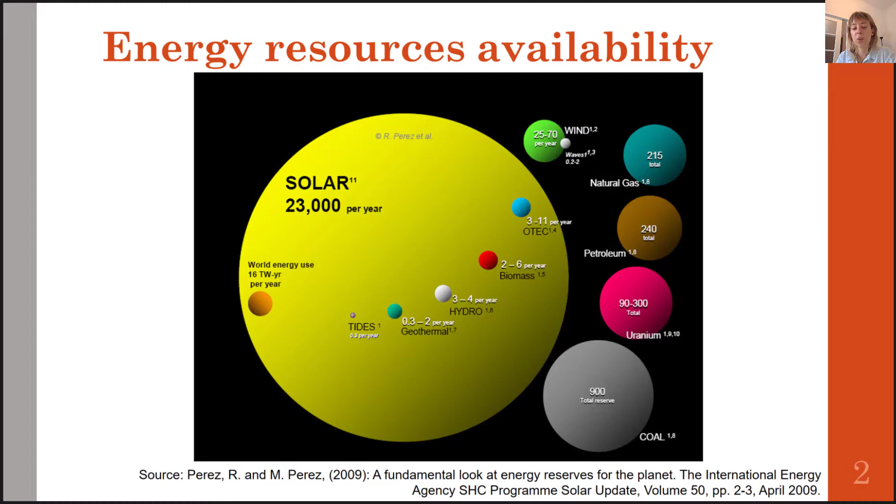Now, despite having so much solar energy available, the problem with the sun is that first, it's dilute, so we only have 1 kilowatt per meter square, and it's intermittent. Every energy resource is going to have its trade-offs, and this is the situation we're dealing with when it comes to solar energy. This is where concentrated solar power comes in. A lot of you are already familiar with concentrated solar power, and some of you may not be. It's a technology that has the potential to eliminate the problem of intermittency in renewable energy.

The way it works is you have this big field of mirrors on the ground that concentrates natural sunlight hundreds to thousands of times and focuses it onto a receiver, which in this design is located at the top of a tower. This is really the state of the art in concentrated solar power technology at the moment. The receiver consists of arrays of tubes with a fluid circulating inside. The sunlight heats the tubes and then the fluid inside. This can be a molten salt heated to temperatures from 500 degrees C to 1000 degrees C, and it's then used as a heat source for power generation.

We can have a closer look at how this tower technology works in terms of power plant operation. The salt exits a cold salt storage tank at 290 degrees C and is circulated to the top of a tower through the receiver, where it's heated by concentrated sunlight. It then circulates back down to a hot salt storage tank, in this case at 565 degrees C. Then it passes through a heat exchanger where it converts water into steam, which is used to drive a steam turbine and produce electricity.

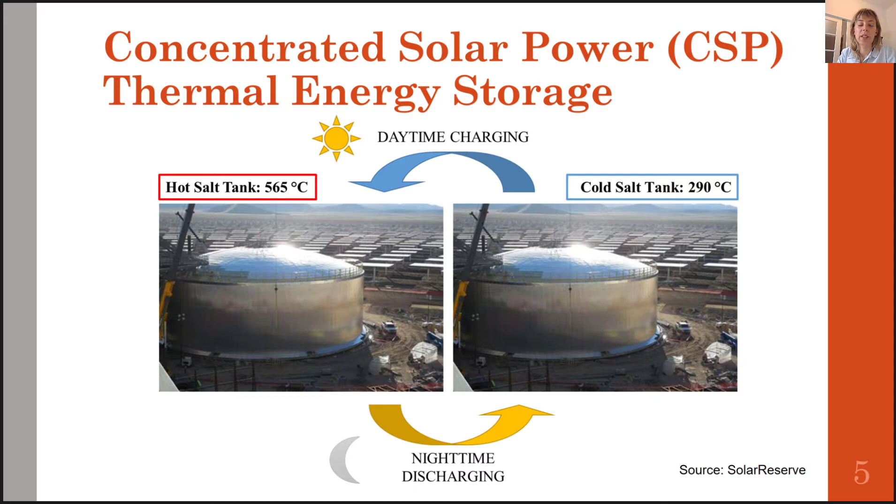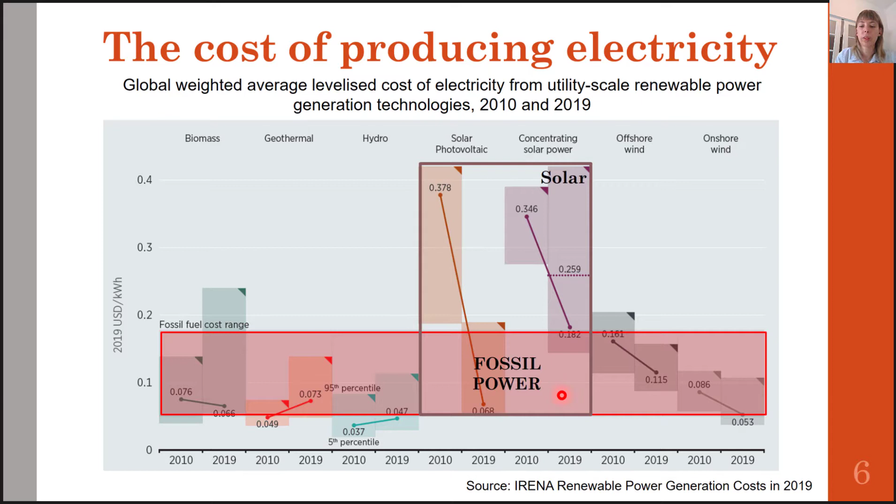And the main reason is CSP plants are still a very large capital cost investment, and so they're really expensive to make. So if we look back at our state-of-the-art solar tower technology, here we have the field of mirrors, so the heliostats are the most expensive components of the entire system.

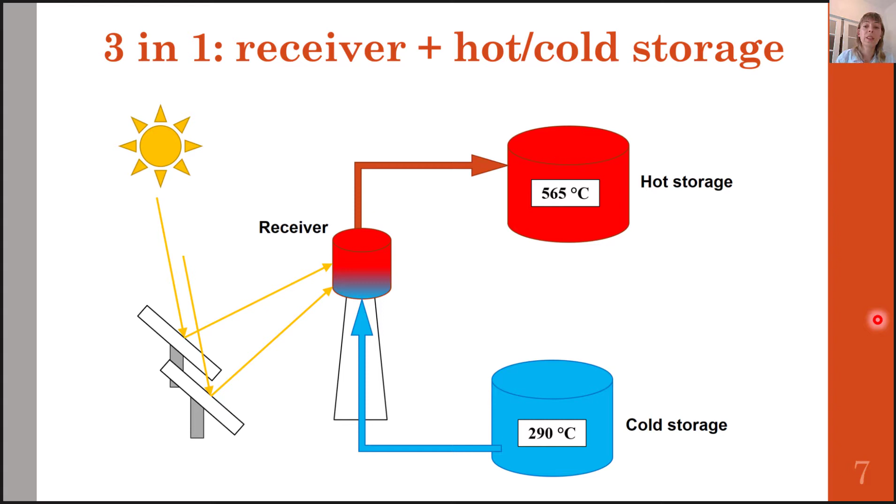Now, the other problem with this technology is we have a receiver and storage technology, so these two tanks that require very high pumping powers in order to pump the salt at very high flow rates to the top of a tower and then to these two storage tanks. So in order to reduce these pumping requirements, which will in turn reduce the cost because we'll also need less heat tracing, we would ideally like to combine all three into a simple single unit.

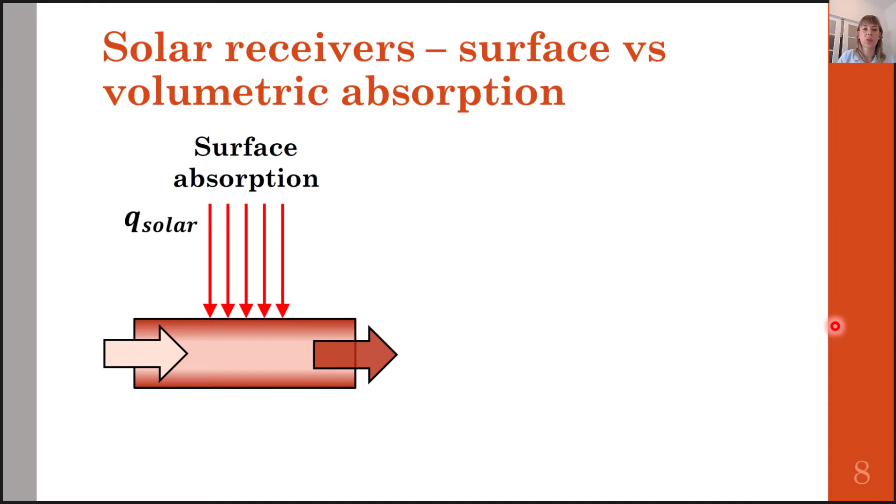Now, the other issue is that the max flux that can be tolerated by the receiver is limited by the tube material. So as you recall, this receiver consists in a bank of tubes, and this concentrated solar radiation irradiates the tubes and then heats the heat transfer fluid. So an alternative is to absorb this concentrated solar radiation volumetrically directly into the working fluid itself. So it's a self-healing surface that can tolerate higher solar fluxes and solar flux variations.

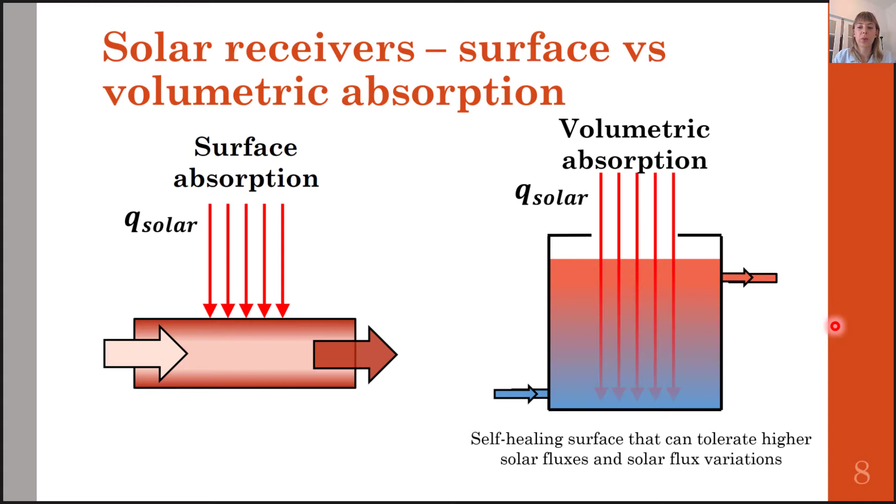So this brings me to the CSPonD concept for concentrating solar power on demand. So in the CSPonD, we essentially have a 3-in-1 CSP concept with volumetric absorption that essentially eliminates all the issues that we have with this tower technology. So the way that it works is concentrated solar power is beamed directly into a big open tank of molten salt where it's absorbed volumetrically since the salt is semi-transparent to solar radiation.

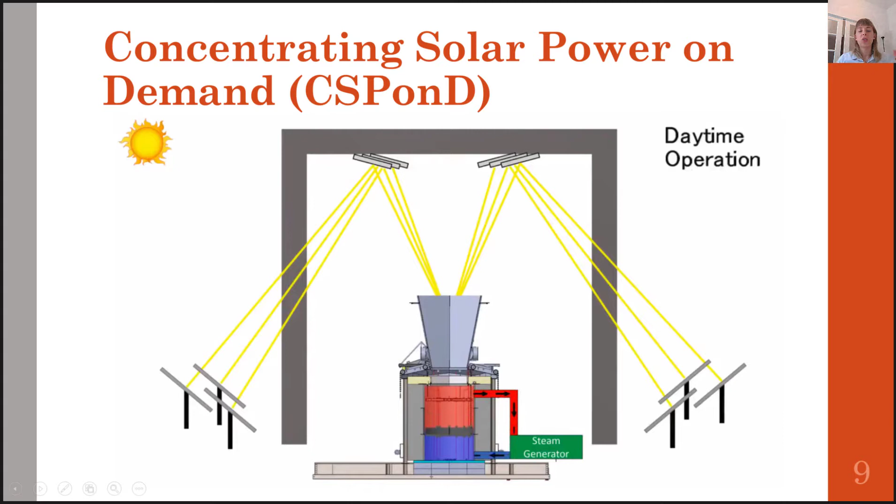Now the tank is divided into two sections by a divider plate. So above the divider plate is the hot heated layer and below is the cold layer. And I have a little animation here that illustrates how the whole system works. So during the day, this concentrated solar power heats the hot layer, and so that hot volume increases, and during the night we close the tank, so we close the aperture, and we continue to extract hot salt from the hot salt layer, except that this hot layer is now decreasing and the cold salt layer is increasing.

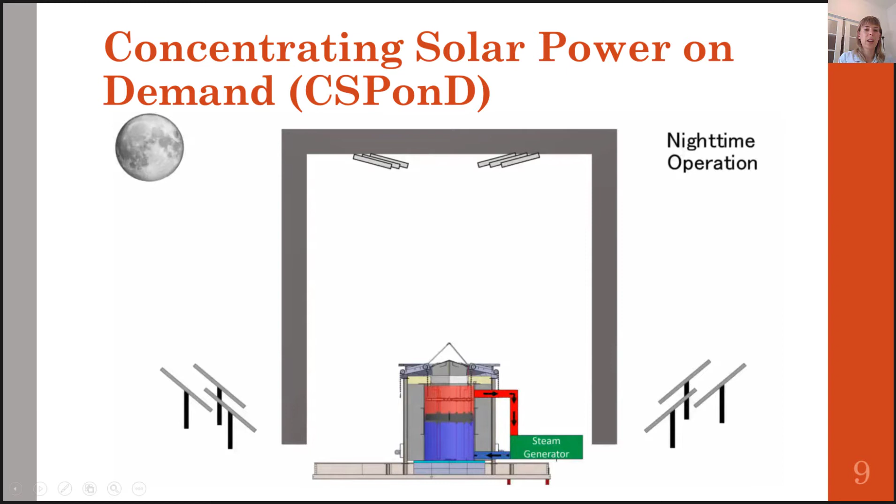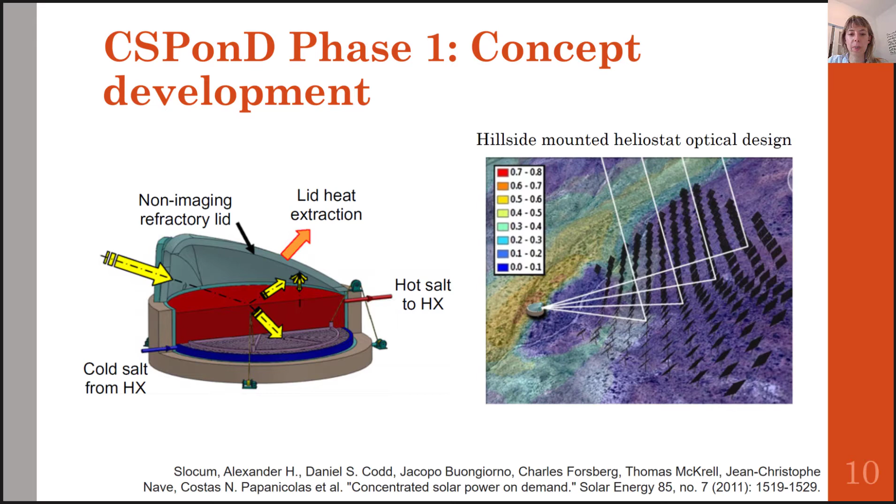So in phase two, this was in collaboration with the Masdar Institute Solar Platform in Abu Dhabi, which is led by Dr. Nicolas Calvet, and it consisted in building a demonstration prototype of a 25 kilowatt CSPond system. So for the demonstration, we integrated the system with our existing beam down facility, but as I just mentioned, a CSPond would not be limited to this optical configuration since beam down technology tends to be a little less efficient in terms of optical efficiency.

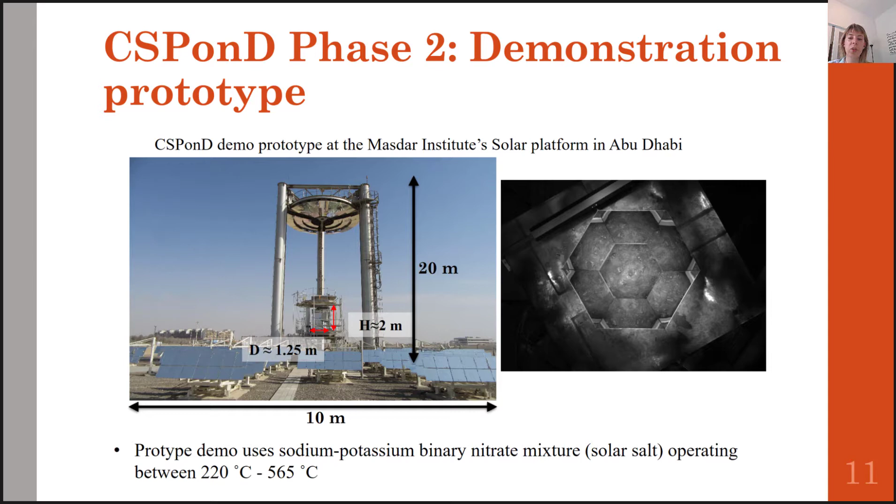So the tank installed is 1.25 meters in diameter and 2 meters in height, and it's filled with sodium potassium binary nitrate salt, which you can see here on the right. This is a view looking straight down into the tank of molten salt.

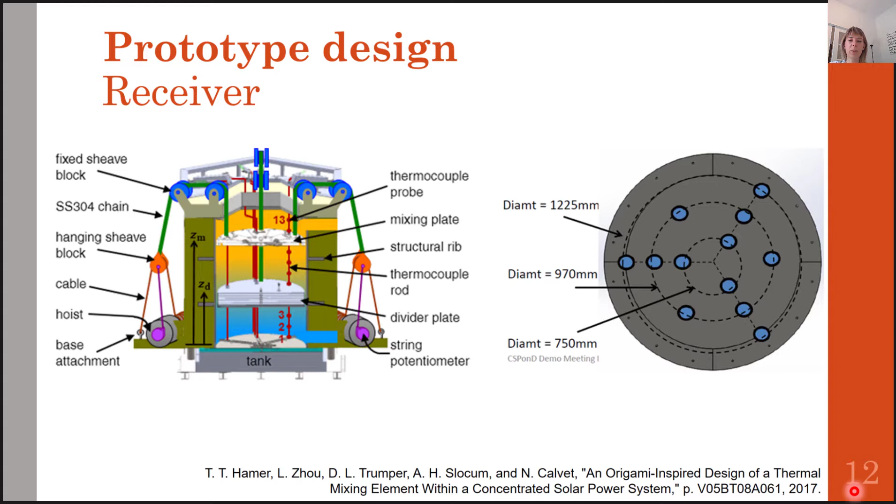So the idea for the divider plate was for the shell to be airtight, such that the poor thermal conductivity of air would insulate the hot layer from the cold layer, and then these internal discs would reduce radiative transfer from the top to the bottom of the divider plate. However, we did have some issues with salt penetrating inside the divider plate, which I'll talk about a little more later.

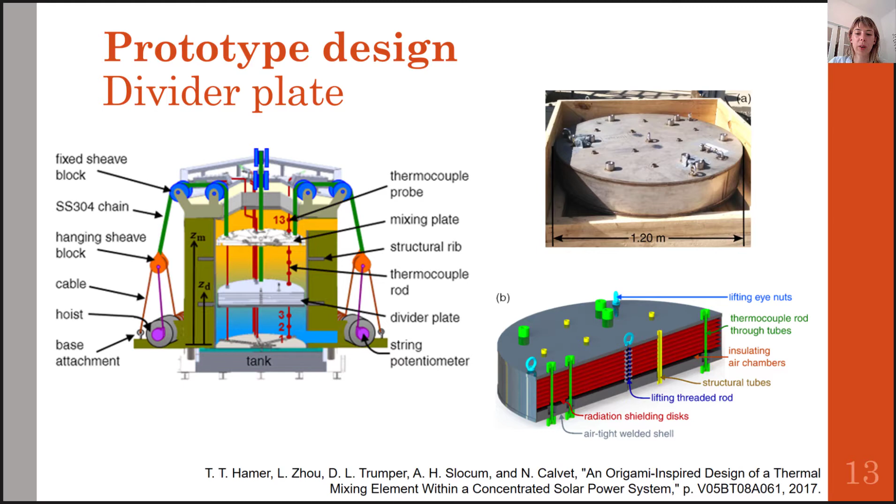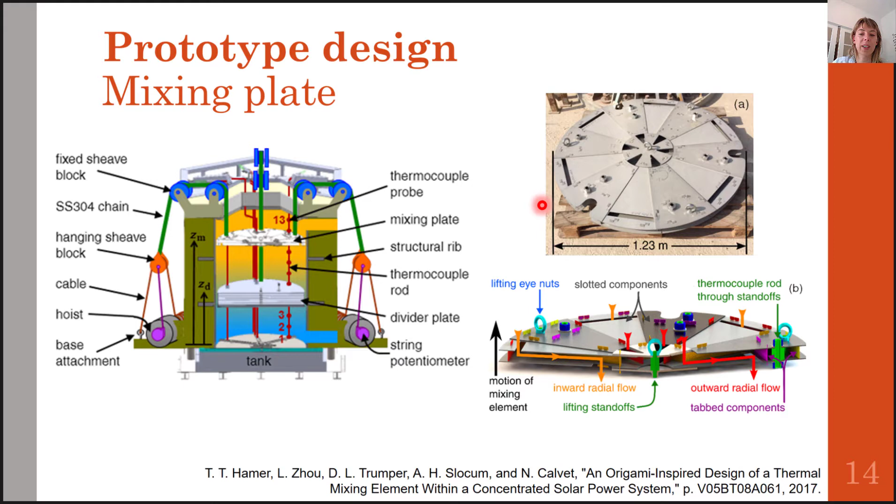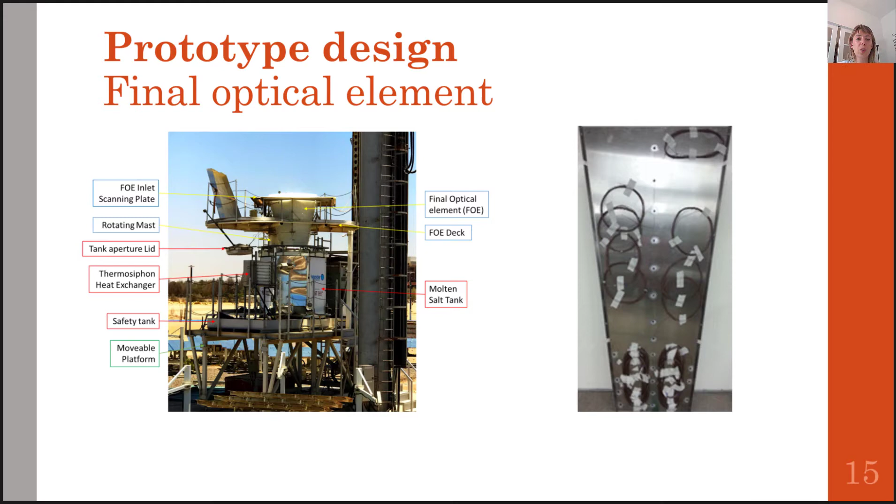Now finally, the tank was mounted with a final optical element, which is a 3D secondary concentrator, to increase the final flux that's delivered to the tank and to reduce the thermal losses. So it consists of a hexagonal cone with aluminum facets, and it was removed at the end of each day, and the tank aperture was closed at night in order to reduce thermal losses during nighttime operation.

So the design and construction of the prototype took several years, a lot of cooperation, coordinating a lot of weekly WebEx meetings for people at opposite sides of the globe. So at the time we had people in California, in Boston, in Abu Dhabi, and I think in China. And there was a lot of sweating out in the desert; that was how this whole construction happened over multiple years.

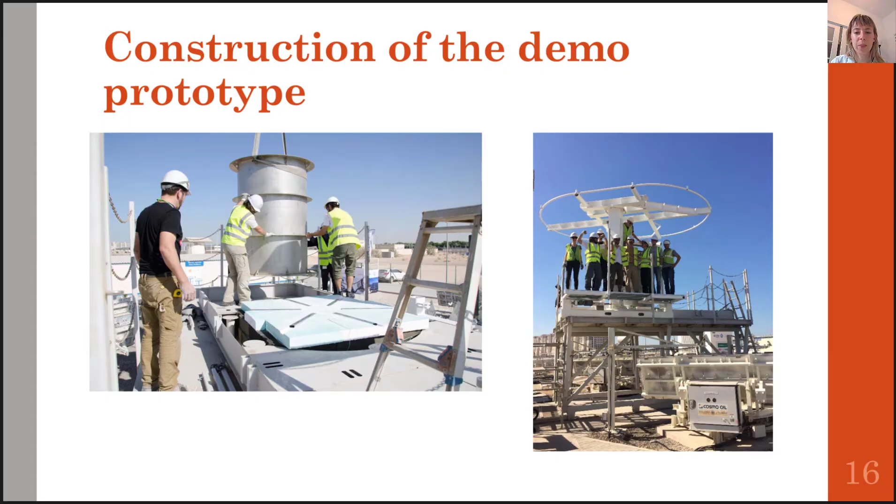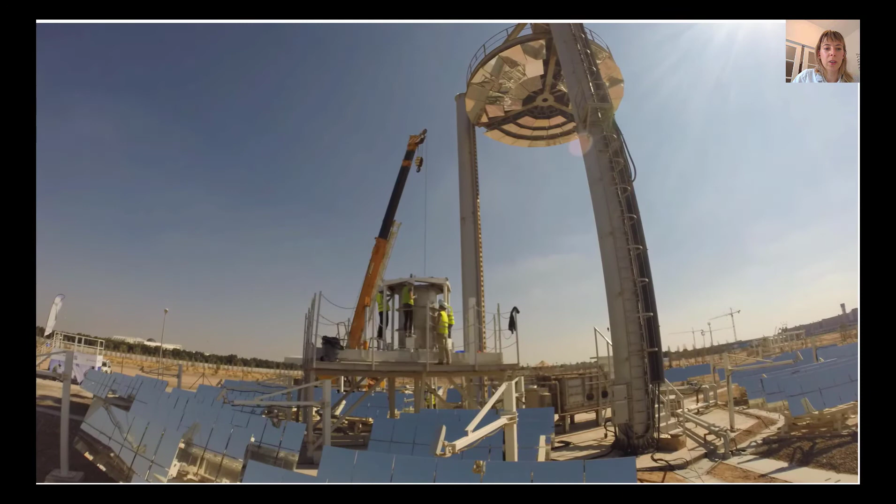So one of our colleagues actually made several videos of the whole construction process over the days and months as it occurred. And so here you can see this was over the course of a day assembling the top collar and the deck platform. So you can see the tank already, and they're installing the top collar. And now we see the deck platform.

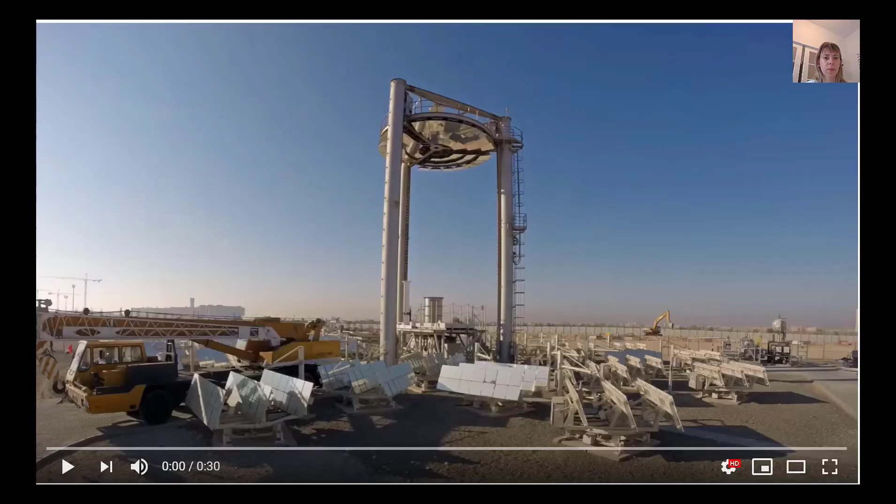And now another video of installing the insulation and the temperature sensors. So I really like seeing the position of the sun change during the day in this accelerated video.

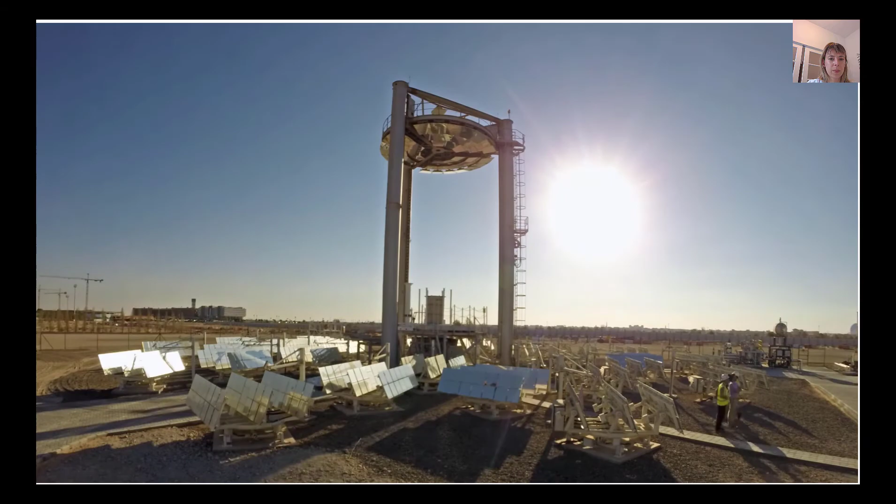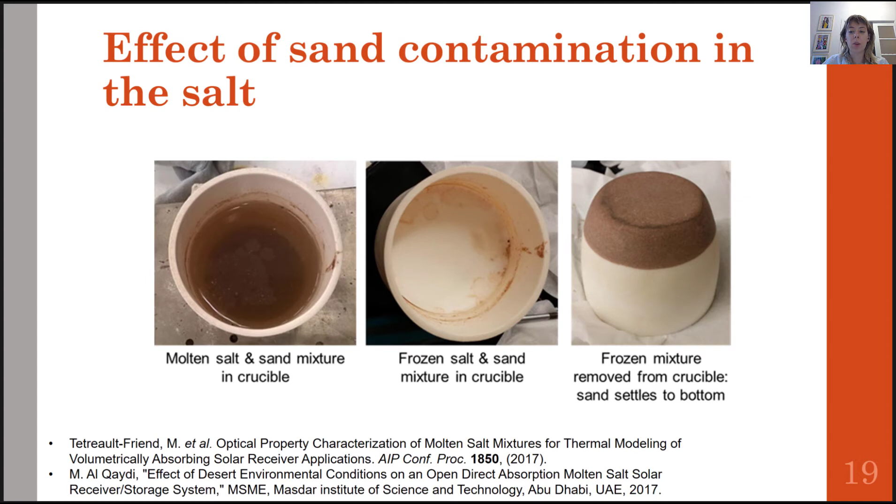So the entire melting process, once we got everything mixed and eventually made a powder out of this giant caked block, took approximately 4 days to complete, and it was done primarily with solar energy, so 80% solar energy, assisted by some electrical resistance heaters. So overall, it was estimated only 20% of the energy used to melt the salts came from external resistance heaters. So in order to accomplish the melting process, each day we added more salts to the tank. So we added some salts, melted it with some solar energy, and then the next day we added more salts, melted with more solar energy, and so on until 4 days later everything was melted.

So this was quite remarkable considering how reflective the salt appears to visible light. In fact, we did not do any optical experiments on the frozen salt, only on molten salts. So we did also look into methods for accelerating the melting process, such as, for example, sprinkling highly solar absorbing slags at the surface of the salt, which would eventually sink to the bottom of the tank once the salt was melted. But we didn't actually need to use them here since we had these resistance heaters, but it is something that we can look into in the future if we really wanted to achieve this without any resistance heaters at all.

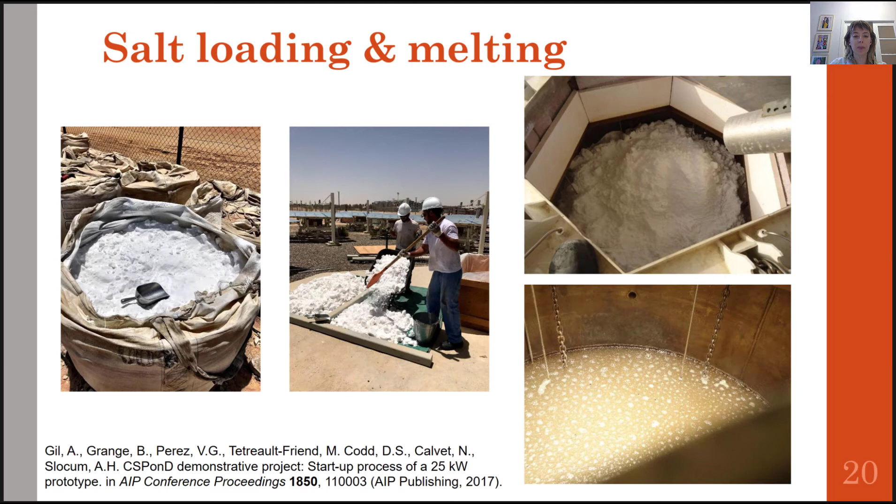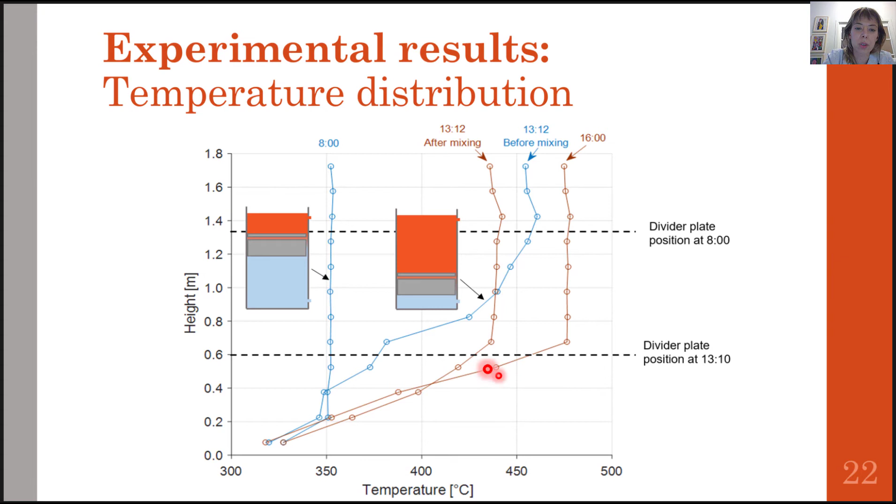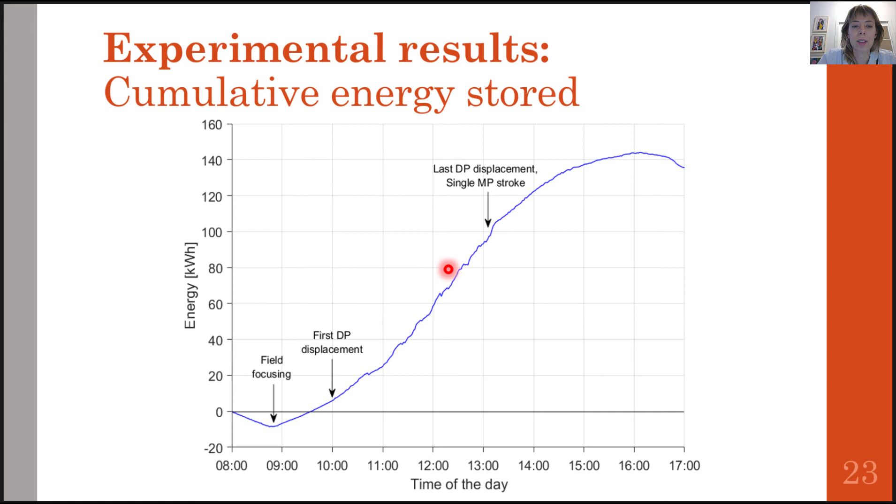Finally, the last experiment that was done was this experiment that we call the uniform charging mode. When the system is to be used to generate electricity only after sunset, the temperature of the hot layer no longer needs to be maintained constant while it's charging. So the receiver losses due to the exposed hot surface can be reduced by charging the entire volume from a colder state to a hotter state, rather than trying to keep the hot layer at some set point throughout. So even with no mixing plate motion, the gradient of temperature in the useful volume of salt is less than 10 Kelvin per meter.

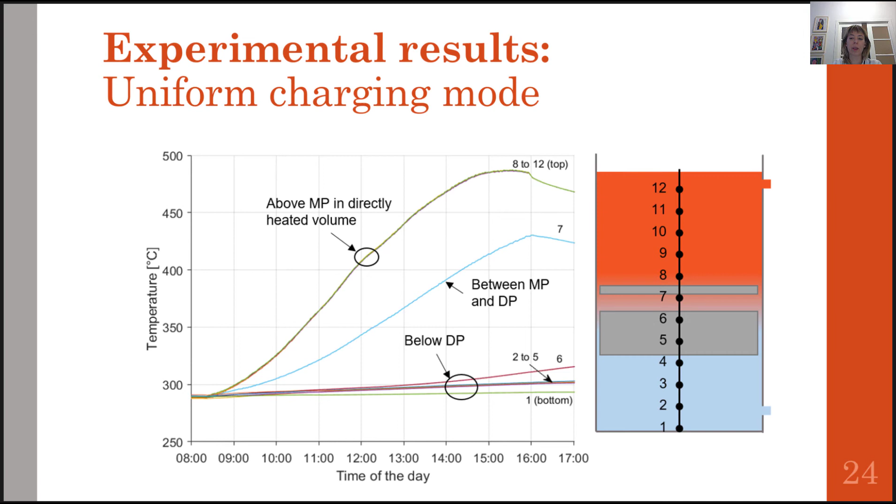So some general conclusions and takeaways. The CSPond allows us to reduce the need of heat tracing that is typically required for tower and receiver piping, because we now have this nice, simple 3-in-1 system. There's no need for high pressure pumps for cold salt transport to the tower receiver, very low parasitic energy consumption. The initial melting didn't require any fossil fuels, so we only needed solar radiation and a little bit of help from our resistance heaters, and it was accomplished in 4 days.

There's no need to drain the solar receiver at the end of each day of operation, and we have a reduced susceptibility to thermal shock because the solar radiation is now absorbed volumetrically. So when we have variation throughout the day due to focusing and defocusing or when clouds pass, it's much less susceptible to shock because it's being absorbed over volume instead.

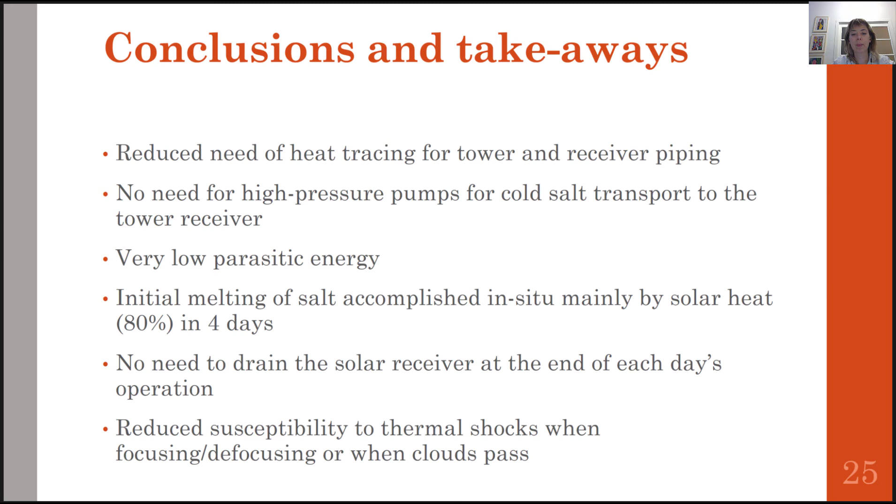Now, some lessons learned and some future work. So there were things, of course, that worked and things that didn't work as well as we had planned. So in particular, if I look at, for example, the divider plate, the pros were it effectively blocks solar radiation from the cold bottom layer. The cons is it was not as effective as we had hoped at thermally insulating each layer.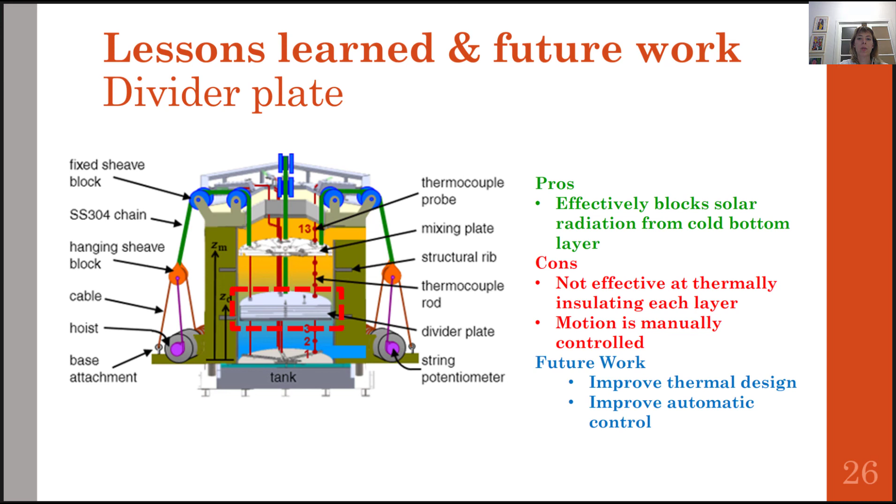So that was one big issue that we had with this divider plate, and the motion is also manually controlled, meaning we do have this hoisting mechanism, but we need some user to actually control its position throughout the day depending on what temperature reading we have. So some future work would be to improve the thermal design and to improve the automatic control of the divider plate.

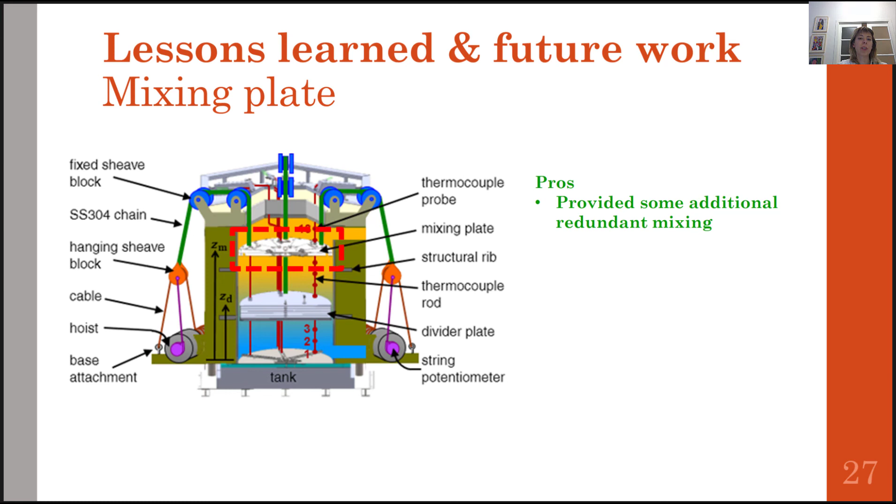Now moving on to the mixing plate. So the mixing plate did a really good job at providing some additional redundant mixing. However, it did block the solar radiation from penetrating to the divider plate. It was not as essential as we initially expected. So if we design the receiver such that we promote passive mixing due to natural convection, we should be able to get away without it.

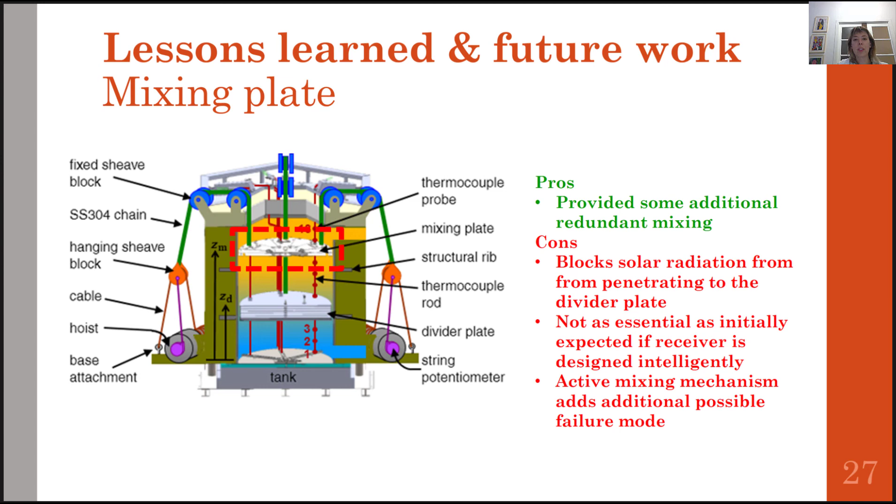And finally, this active mixing mechanism, so we have more hoisting mechanisms, and all of this active mixing is an additional possible failure mode in the receiver. So it is something to consider. So future work involves implementing passive mixing inside the receiver.

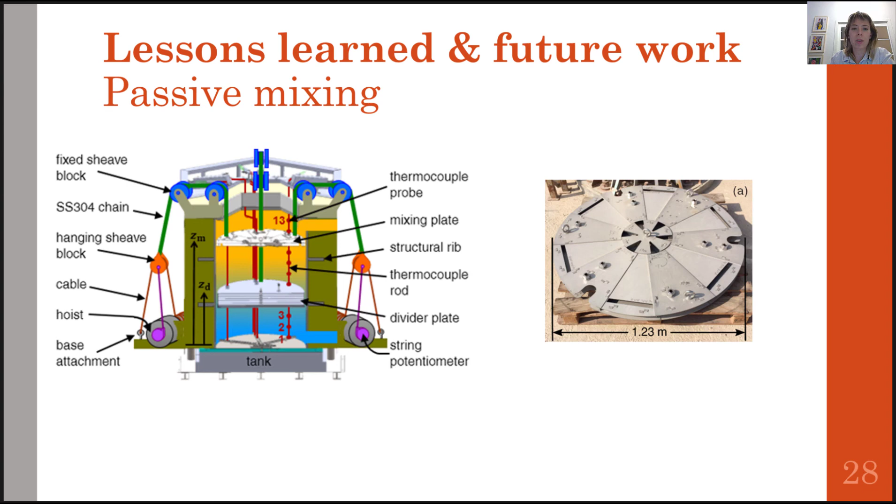So how do we actually get this passive mixing? And as I said earlier on, I mentioned that the reason why we put the mixing plate in the first place was because we had a very poor understanding of the overall thermal fluid behavior. So that has changed in all the years since starting this project. We did gain some insight in the thermal fluid behavior inside the receiver.

And so by doing some CFD and some theoretical analysis, we now have some models to actually predict the temperature distribution in the receiver as a function of time, and to actually predict what conditions are favorable for natural convection.

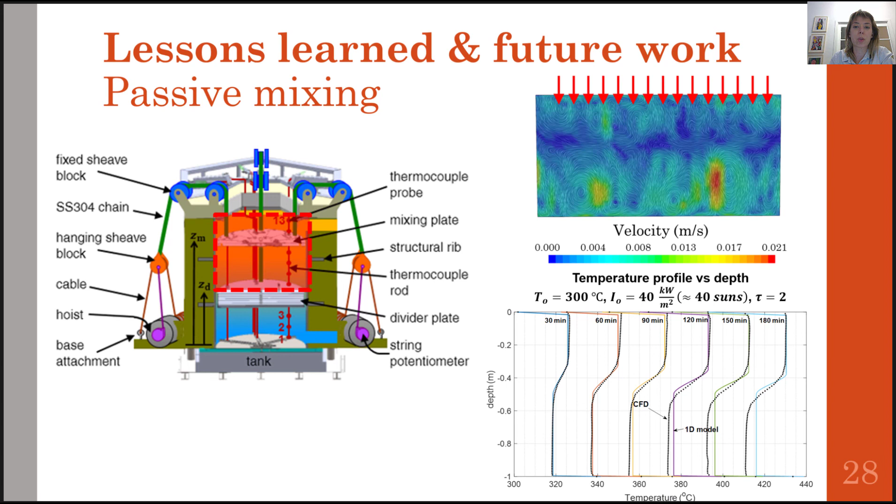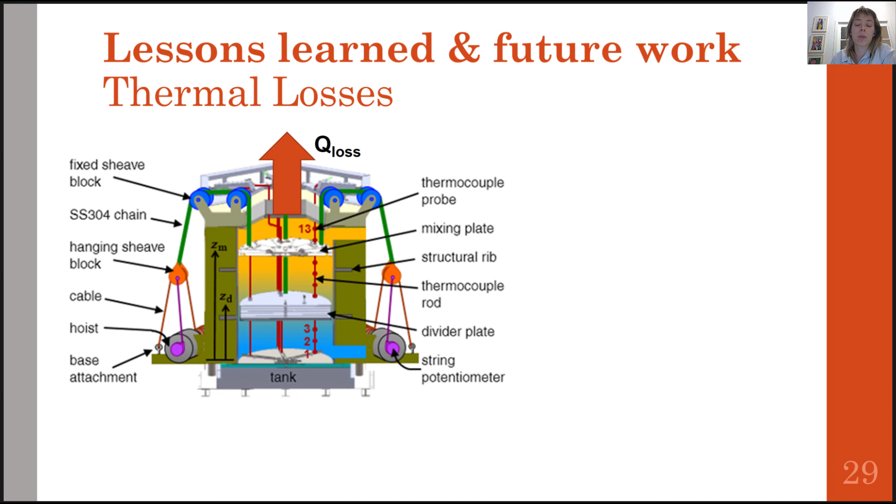Now, one of the very important points to address here are the thermal losses, because as we know, we have this big tank of molten salt that's open to the atmosphere, and so we do have thermal losses from this exposed salt surface at high temperature. And so, of course, the advantage of having this big open tank is that we enable direct volumetric absorption, but the downsides are that we have thermal losses, and also it's open to dust and sand from the surrounding environment. So future work involves integrating a solar transparent cover.

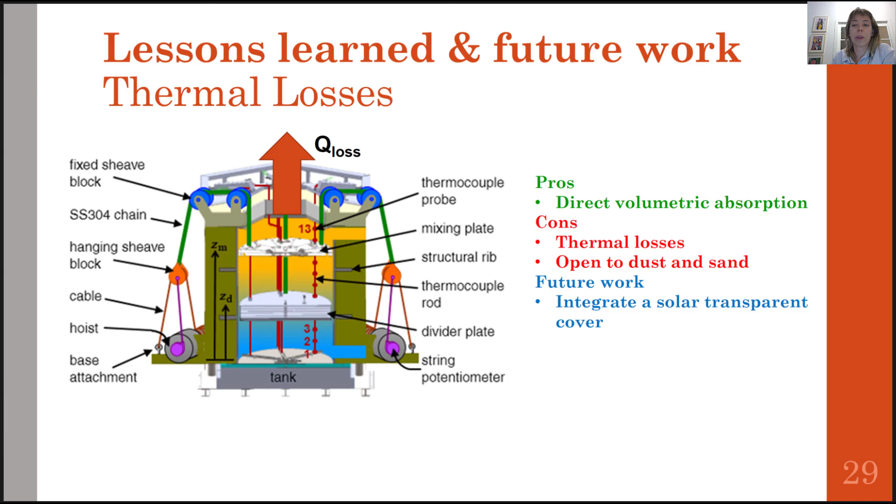So we did work on this in the lab, and we developed an insulating cover for this direct absorption molten salt receiver. So it's solar transparent, and it reduces thermal losses up to 50%. So it consists of these hollow quartz spheres that are floating around on the surface of the salt. And so the remaining work is to just actually deploy it in the prototype and test it under real solar conditions and not just in the lab.

Now, we talked about the thermal losses, so thermal efficiency, but there's also the optical efficiency. So we can improve the geometry of the aperture, but most importantly, we can deploy the concept in some alternate, more efficient solar field and receiver configurations. So as I said, this was all tested and demonstrated in a beam down facility, which has 2 reflections. But the CSPond concept was actually developed with hillside mounted heliostats in mind. So that would eliminate one additional reflection, which would reduce the optical losses.